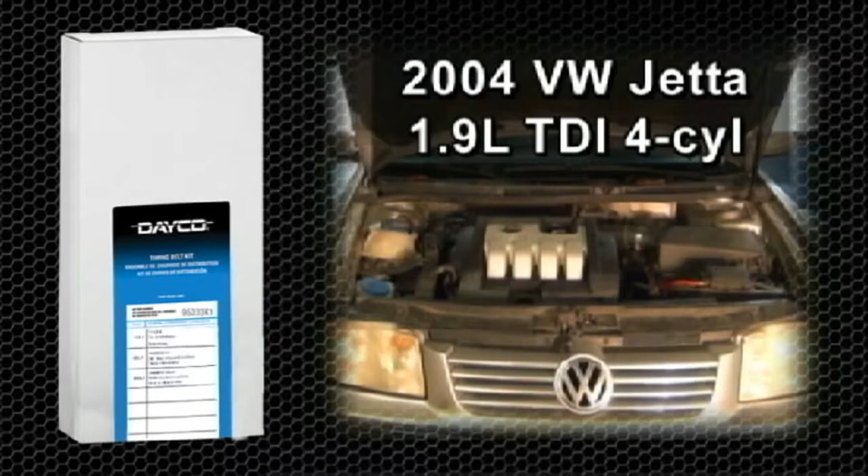This video highlights some of the steps involved in installing the Dayco timing belt kit number 95333K1 on a 2004 Volkswagen Jetta with the 1.9-liter TDI 4-cylinder diesel engine. The kit includes a high-performance, high-temperature timing belt number 95333, an OEM quality tensioner, and an idler pulley.

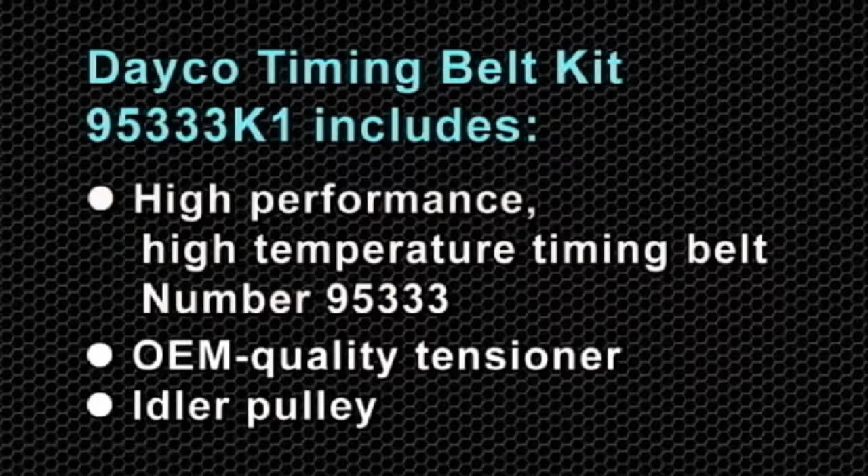As usual, instructions are included in the kit, and these should be followed exactly. For safety's sake, the key should be removed from the ignition, and the negative battery cable should be disconnected.

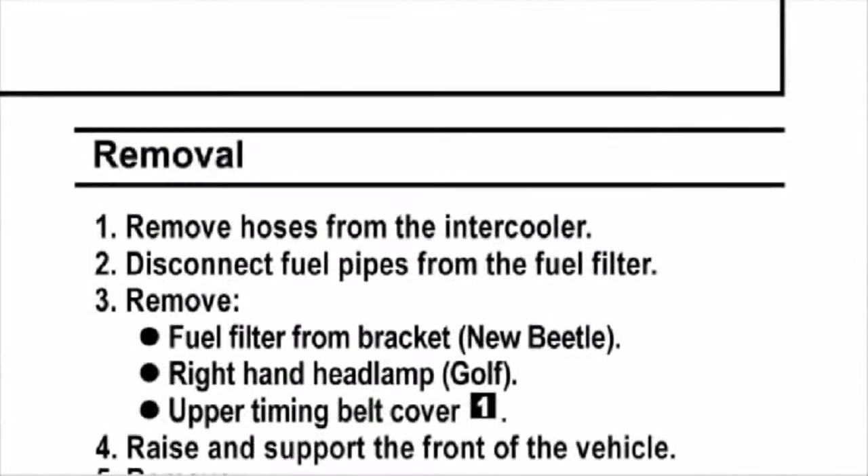The Autodata instructions list begins with the items that need to be removed in order to provide access to the accessory belt and timing belt drives. The following video contains some, but not all, of the steps listed in the instructions.

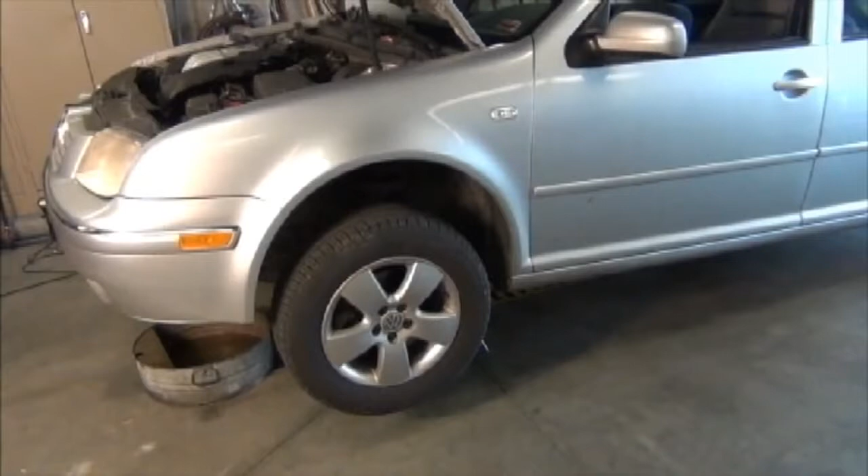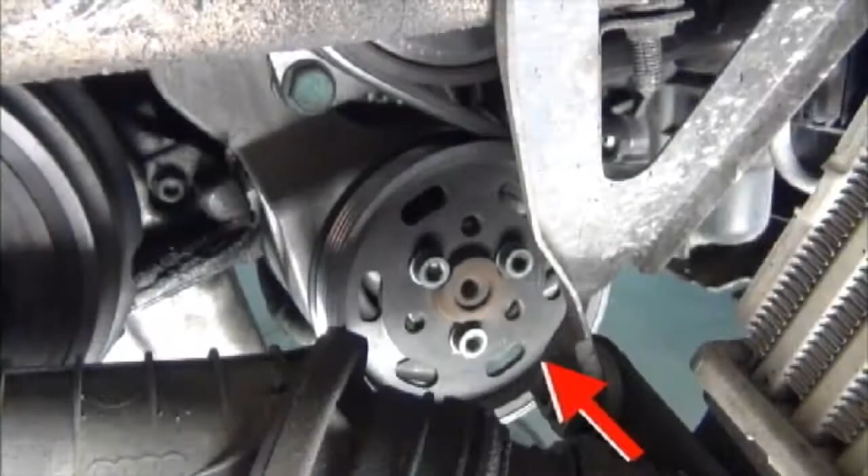The front end of the vehicle should be jacked up and then supported by jack stands. Remove the right front wheel, then the wheel tub, and finally the splash pans. This will provide access to the bottom of the accessory drive, the crankshaft harmonic balancer and pulley, and the intercooler.

The turbo hoses will have to be removed to access the crankshaft balancer and sprocket and the accessory drive.

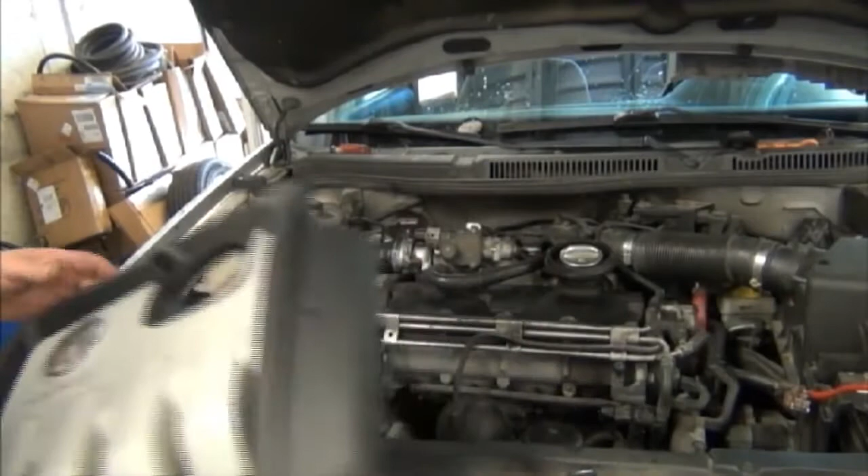At the top of the engine compartment, unbolt and remove the engine cover. Also, unbolt and remove the coolant fill tank, disconnecting the hose from the radiator.

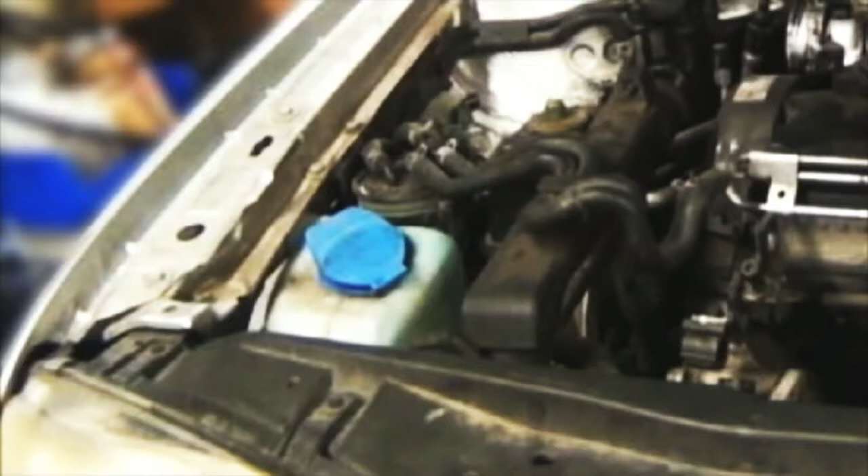Next, disconnect and remove the intercooler intake hose. Toward the front of the engine compartment, remove the headlight bucket so you can remove the front intercooler intake ducting and any fuel lines that might get in the way.

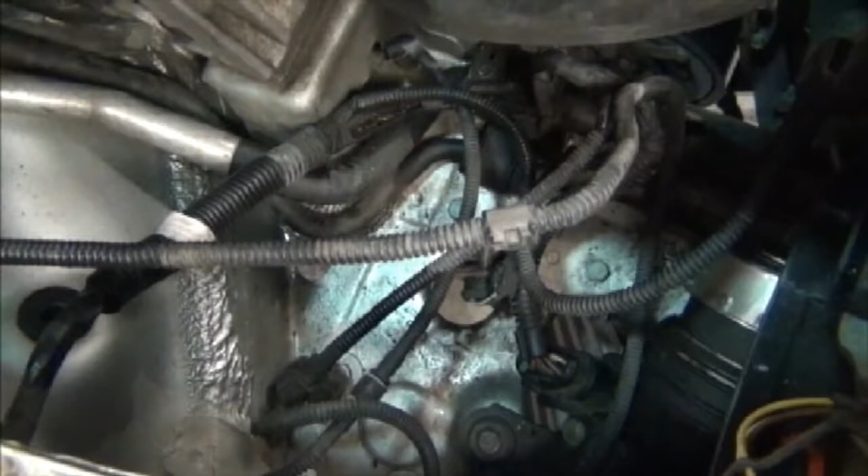Here's a view looking down the right fender after the fuel vapor filter canister and windshield wiper fluid reservoir have been removed. With these items out of the way, access was gained to the clip on the turbocharger intercooler inlet tube. The next item to focus on is the power steering reservoir and its attached hose.

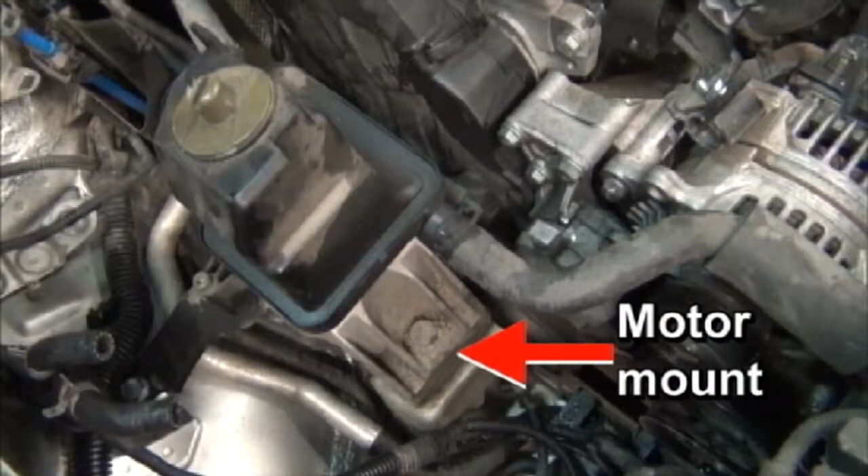Removing the reservoir and bending back the hose will permit much easier access to the motor mount beneath them. After draining the power steering reservoir, its hose can be bent back and it can be parked on top of the strut tower.

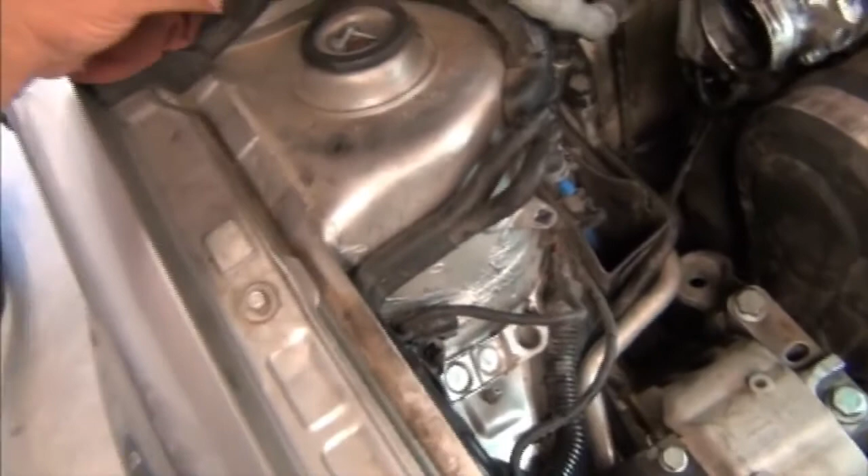The next step is to remove parts of the accessory drive. Engage a wrench onto the square tab at the top of the tensioner and rotate it to release tension on the belt.

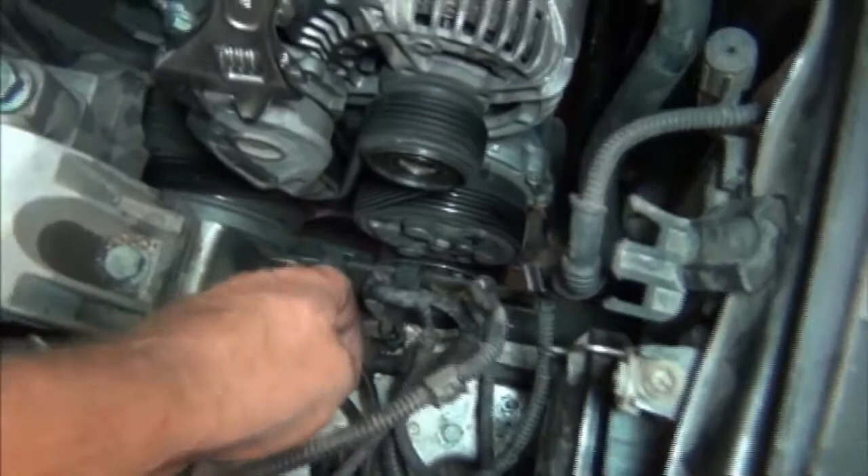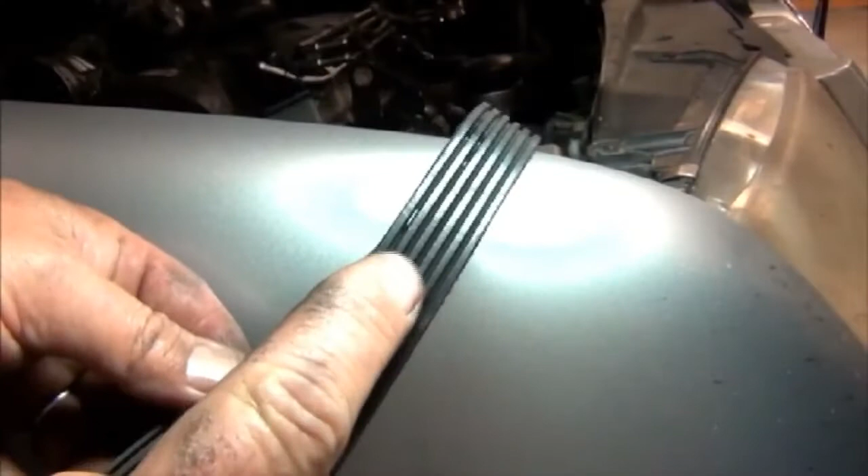Now the belt can be removed from around the accessory drive pulleys. The accessory drive belt is a dual-side poly V. The side that has been running against a flat pulley has ribs that are worn down and shallow. Some pilling can be seen on both sides of the belt. This belt is ready for replacement.

The tensioner should be removed and tested to see if it also needs replacement. The alternator pulley was making noise when the vehicle was brought in and has a lot of play, so it will definitely be replaced. Looking at the top of the engine compartment, this is the top half of the timing drive cover, which has been removed.

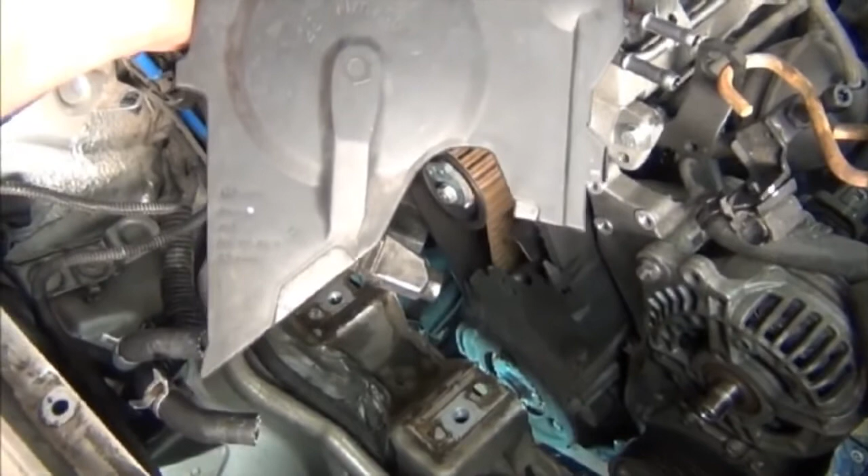The notch in the bottom edge fits around the upper motor mount bracket, which has been unbolted and slid to the rear. Completely removing the motor mount is extremely difficult, and this placement still allows adequate access to the timing drive belt and automatic tensioner.

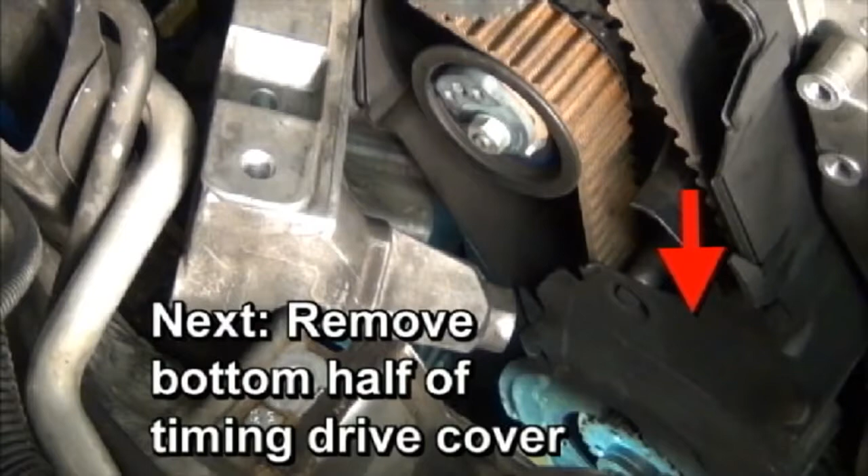The next step would be to remove the bottom half of the timing drive cover. With the lower timing drive cover removed, this is the view looking upward from the crankshaft pulley toward the water pump, which shows signs that it was leaking coolant.

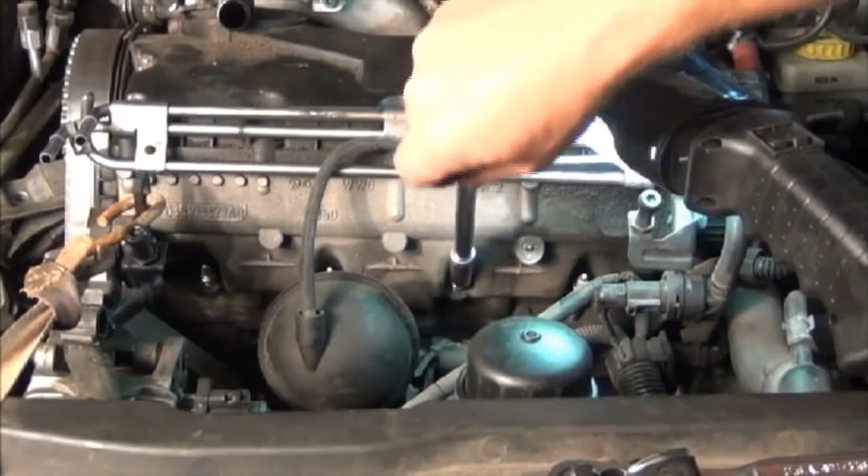This water pump will be replaced as part of this service. To facilitate the manual rotation of the engine in a few minutes, the glow plug should be removed in order to eliminate compression within the cylinders.

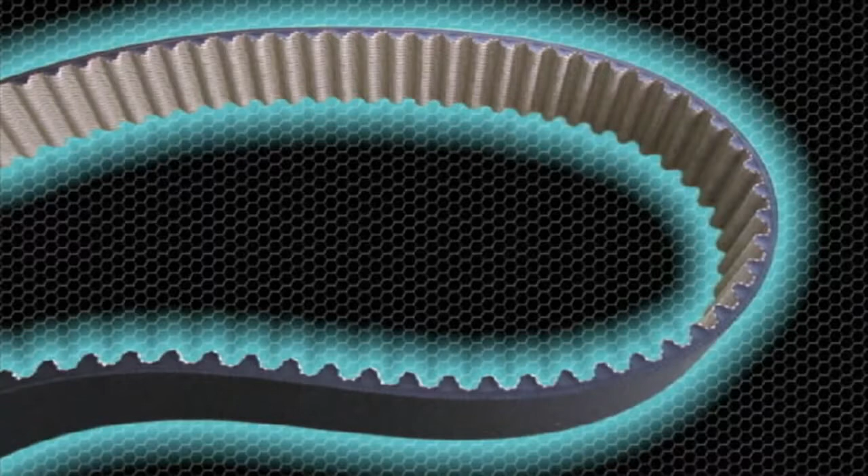Here is the kit mentioned earlier that will be installed, the Dayco timing belt kit number 95333K1 with components. It includes Dayco's high-performance, high-temperature belt. The kit also includes an automatic tensioner.

When the preload is set correctly after installation, this point will be centered in this window. The kit also contains the Autodata instructions for the application.

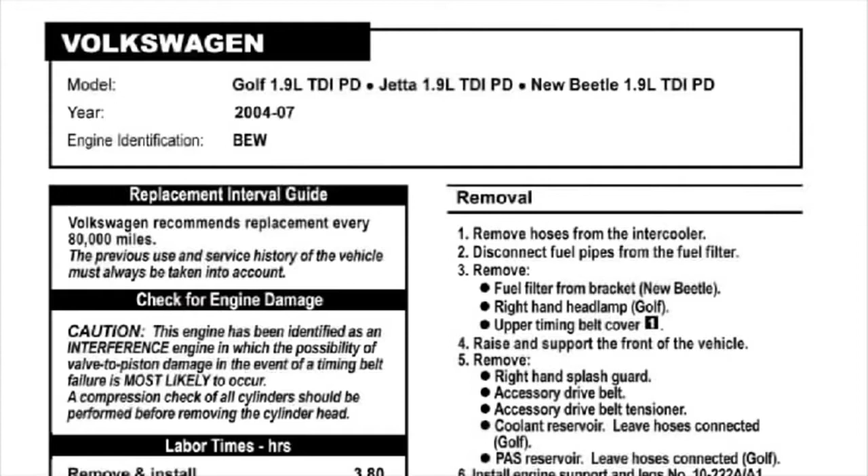If these instructions are consulted at this point in the process, it can be seen that the current step is removal step number 8: turn the crankshaft clockwise until the number 1 cylinder is at top dead center of the compression stroke. Continuing, step number 9 is ensure that the timing mark is aligned with the notch on the camshaft sprocket hub 4Z, which is shown on the drawing as illustration 8.

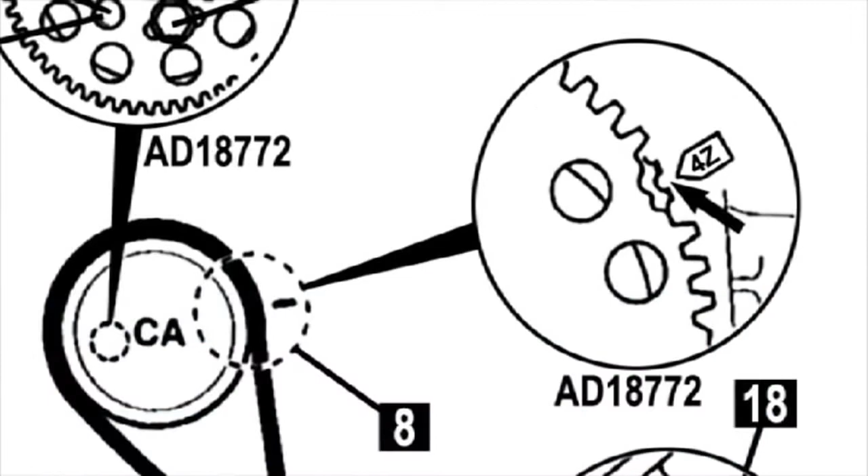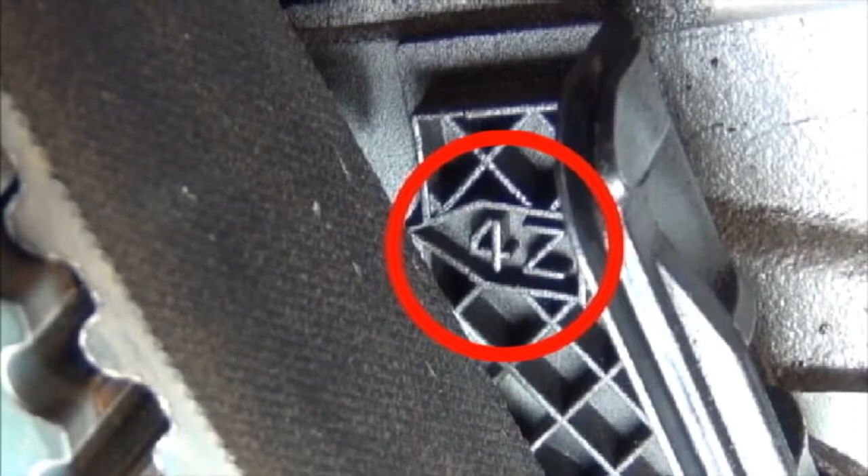This shows the back of the cam cover at the cylinder head at about the 3 o'clock position. There will be an arrow with 4Z on it, which should align with the notch on the camshaft sprocket hub. Here's the actual 4Z arrow that is molded into the back of the timing drive cover. If the camera is moved to the right, the notch can be seen on the reluctor ring behind the cam sprocket.

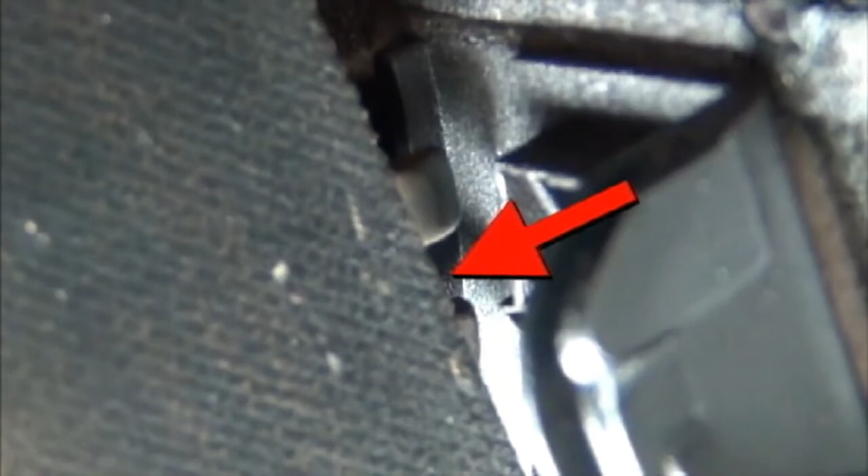This notch actually serves as the trigger for the cam sensor. Next, step number 10 says, lock camshaft.

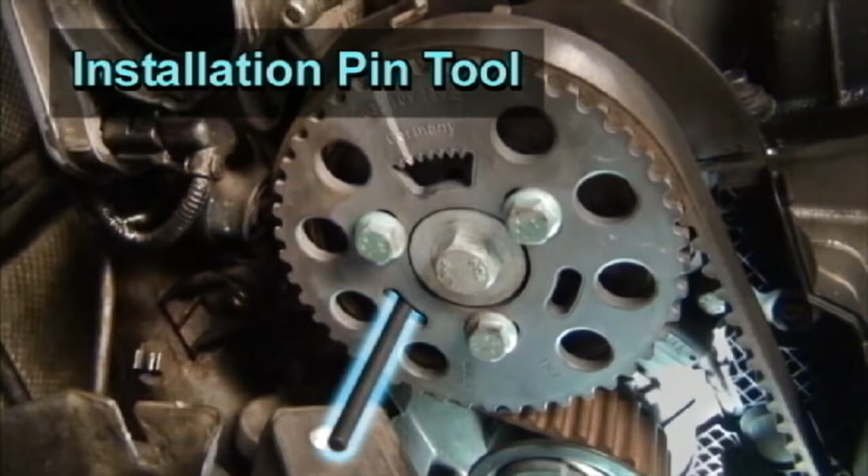Use tool number 3359. Here's the camshaft with the installation pin tool installed. It goes through the sprocket into the designated hole in the cylinder head. Its purpose is to hold the internal assembly in the proper location.

These bolts will be loosened in order to get the belt tension set correctly on the tight side of the belt. That allows this sprocket to be a floater while the belt tension is being adjusted, while the pin is holding the internal assembly in place for perfect timing.

Step number 11 says, lock the crankshaft sprocket. Use tool number T10050. Back in the wheel tub on the passenger side, alignment marks have been made on the crankshaft sprocket and the front of the engine case.

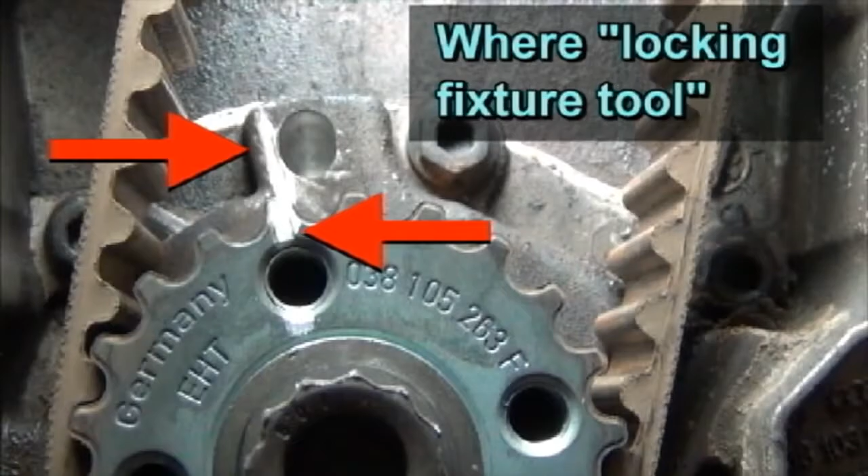This is where the locking fixture tool will be applied. Going to the instructions, illustration 11 shows the crankshaft with the two alignment marks.

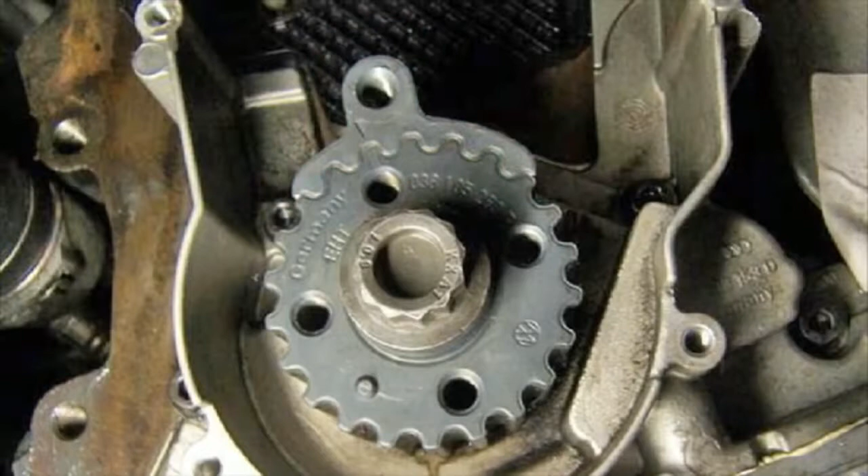Illustration 10 indicates the locking tool that holds the crankshaft in position. Here is a shot of the locking tool in position on the crankshaft, and here's an even closer look. Some versions of this tool have a knob on the end to make installation easier.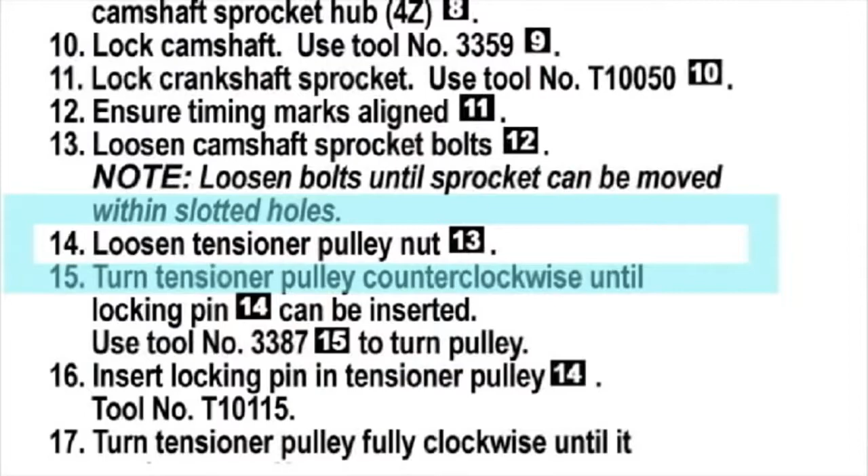Step number 14 is loosen the tensioner pulley nut, which is indicated in illustration 13 in the drawing. While loosening the tensioner pulley nut, at some point the spring will unload, thereby loosening the tension on the timing belt so it can be removed.

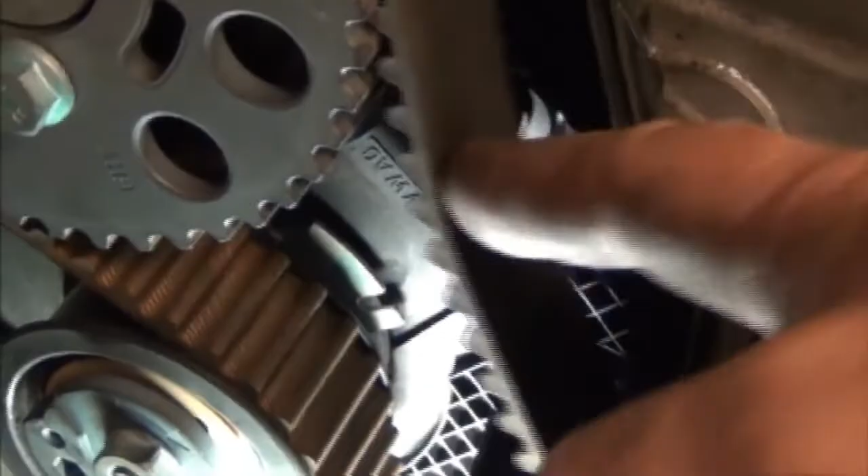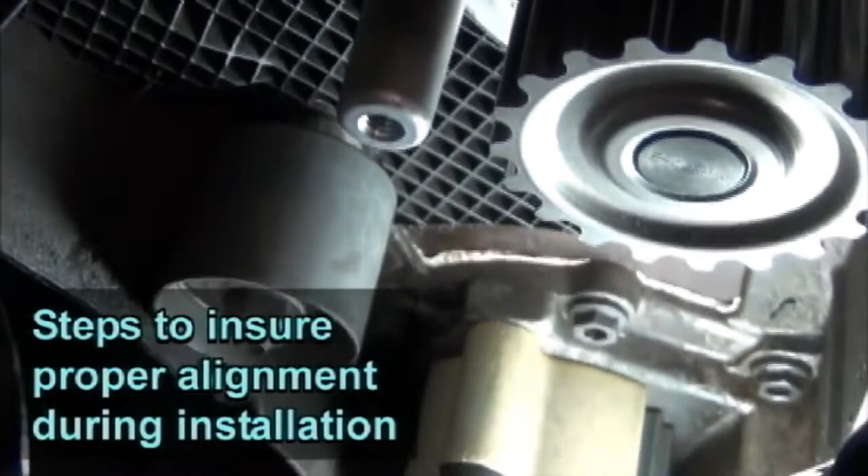The old timing belt and tensioner have now been removed. To review, the following steps have been taken to ensure proper alignment of the drive during the installation of the new timing belt. A new water pump has been installed to replace the old leaking pump.

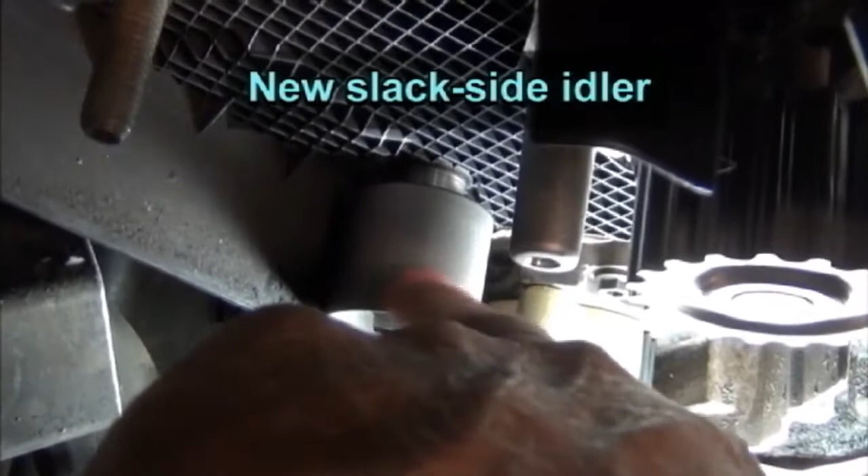A new slack side idler has been installed. Dayco strongly recommends that all hardware be replaced on a timing drive while this level of access is available. The cost of labor to get back inside the drive again later far exceeds the hardware cost.

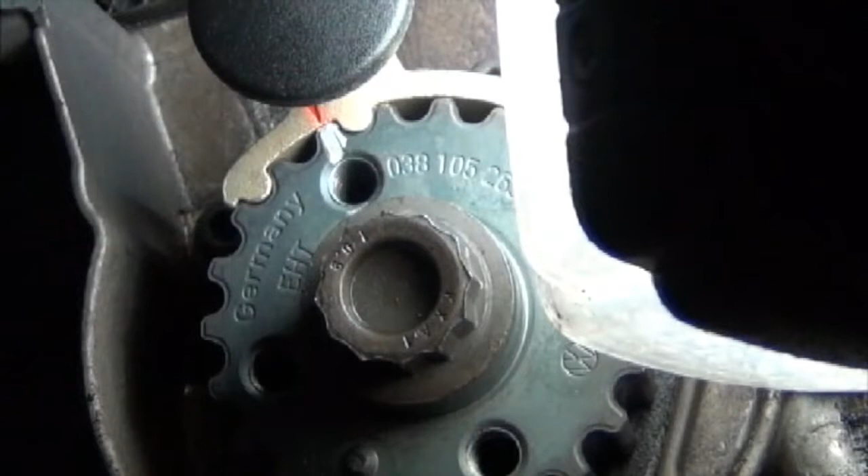Continuing with the steps, the crankshaft locking tool has been inserted into the hole in the engine so that the red arrow on the tool lines up with the mark on the sprocket. Here's a view from above to show how the tool fits.

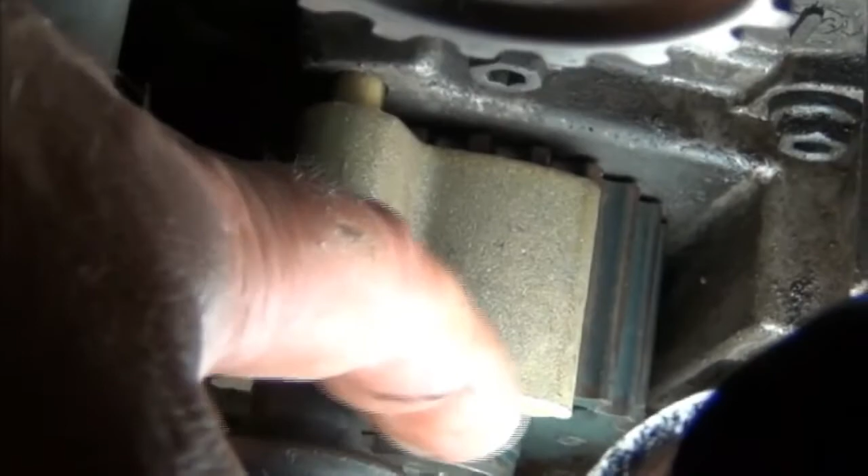The camshaft installation pin has been inserted through a slot in the camshaft sprocket into the cylinder head to keep the internal assembly in place so that the notch in the reluctor ring is aligned with the 4Z arrow molded into the back of the cover.

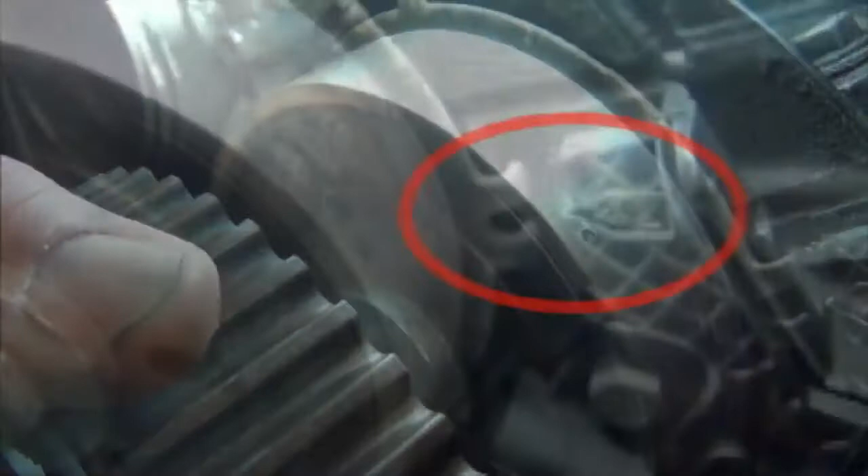Removing the sprocket allows a much better view of the reluctor ring and its notch. Before the new belt is installed, the new tensioner must be installed and adjusted.

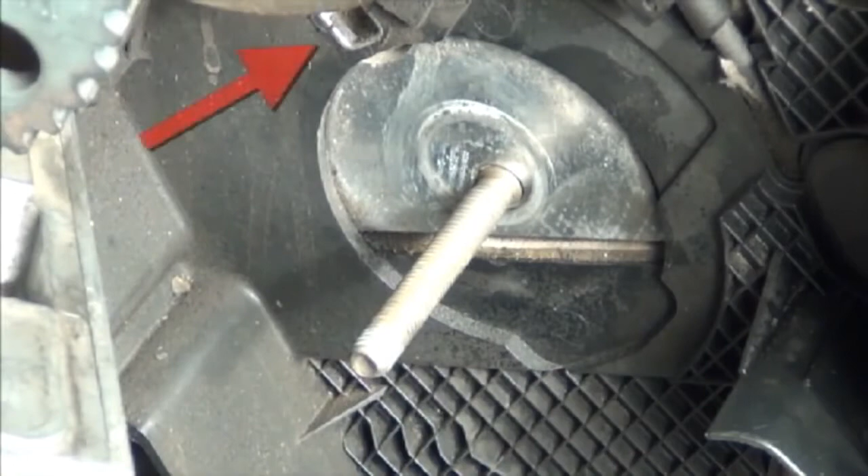On the back side of the tensioner, there is a retaining lug that fits into an indentation in the back of the engine case. Removing the camshaft sprocket gives a clear view of the indentation into which it must index. The retaining lug can be seen in illustration number 16.

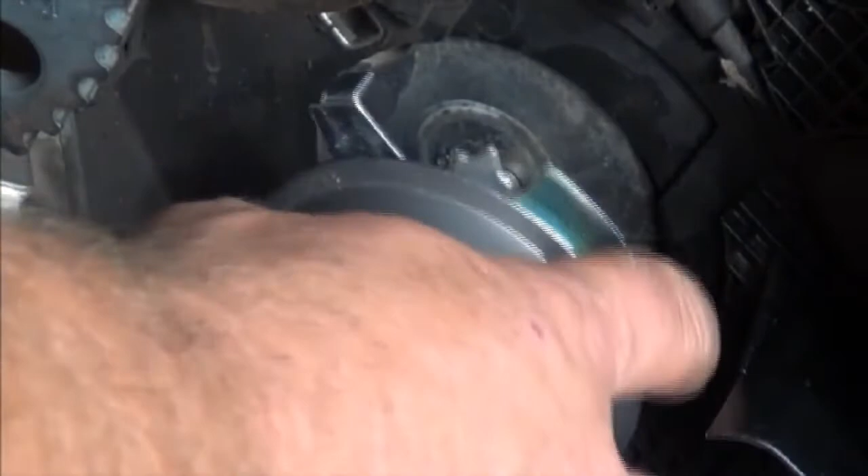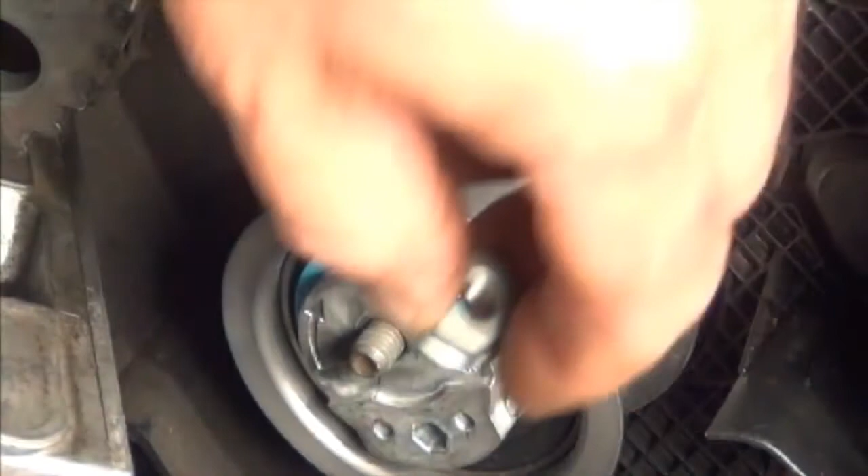The tensioner is slid onto its mounting stud, with the retaining lug properly indexed into the indentation. A slight wiggle will verify this. Next, the tensioner nut is threaded onto the mounting stud, finger tight.

Installation step number 4 calls for the insertion of the tensioner locking pin before installing the tensioner, but it can also be done after step number 5.

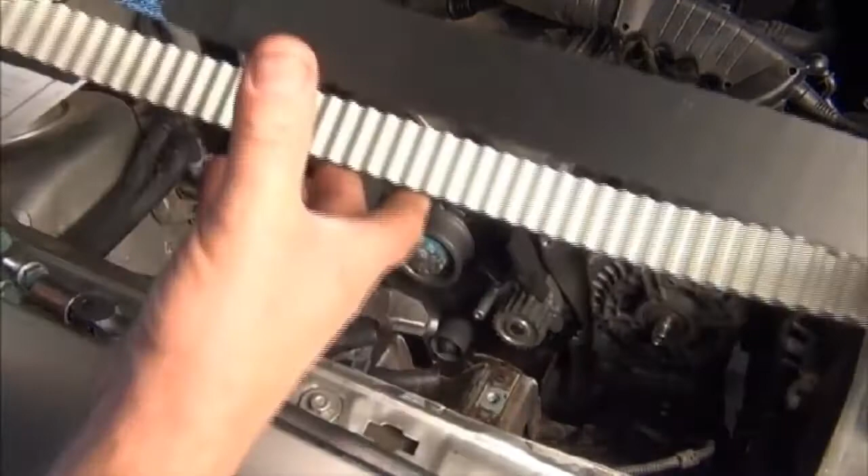Now it's time for the new belt installation. The belt is typically installed so that the belt label reads correctly in the direction of rotation, in this case, left to right. The installation should begin at the crankshaft pulley and proceed in a clockwise direction according to step number 7.

Once the belt has been loosely fitted around the correct routing for the drive, the next step is tensioning.

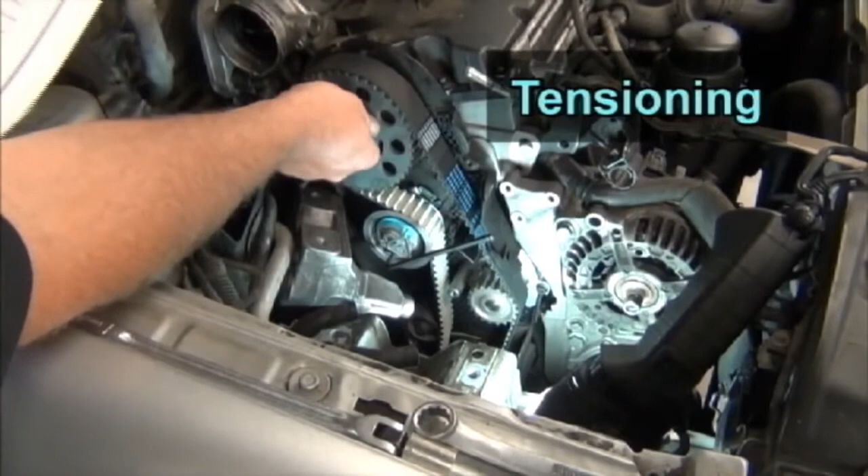The bolt in the camshaft sprocket must be backed off enough for the sprocket to turn freely. The tensioner nut must also turn freely, and the tensioner locking pin must still be installed. The drive is now ready for the correct tensioning adjustment.

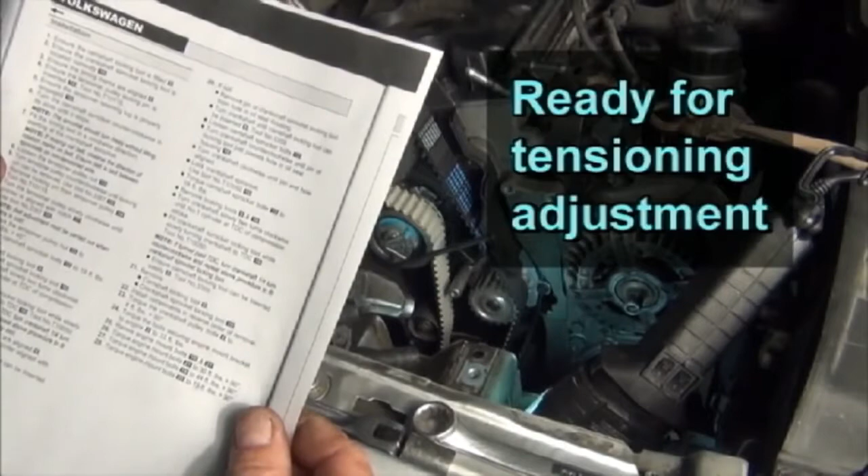Following step number 9, turn the tensioner pulley counterclockwise until the locking pin can be removed. Next, the locking pin is removed.

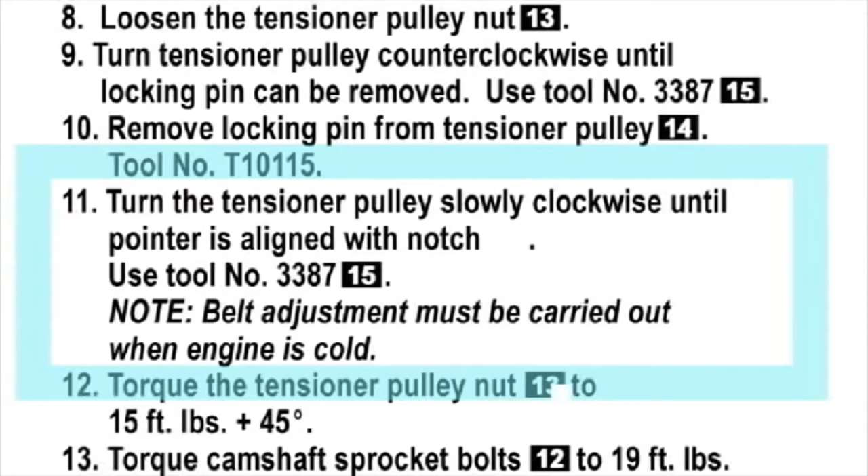In step number 11, the tensioner pulley is slowly rotated clockwise until the pointer is aligned with the notch in the window. Here is a close-up of the correct alignment of the pointer in the window.

The tensioner nut is ready for an initial tightening, and then a final tightening to the torque spec in step number 12, to 15 foot-pounds, plus an additional arc of 45 degrees tighter. Next, the camshaft sprocket bolts are torqued to 19 foot-pounds.

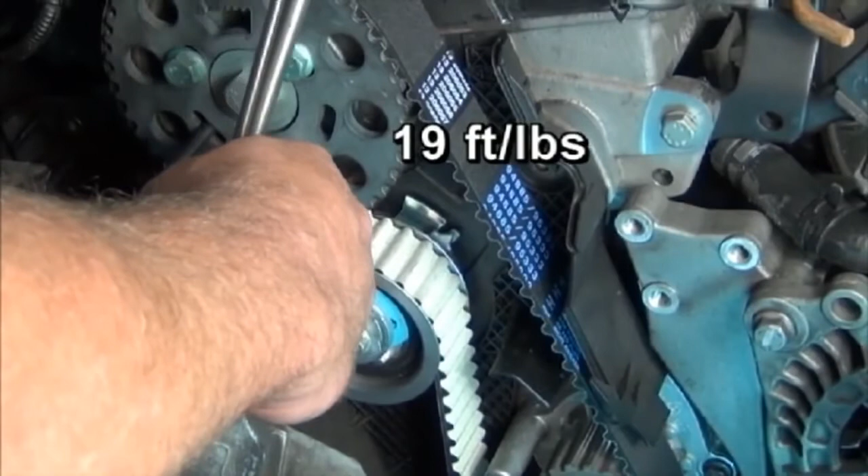Now the camshaft locking tool can be removed, as well as the crankshaft locking tool.

Next, step number 15 should be followed to rotate the crankshaft slowly 2 turns clockwise until the number 1 cylinder is at top dead center of the compression stroke.

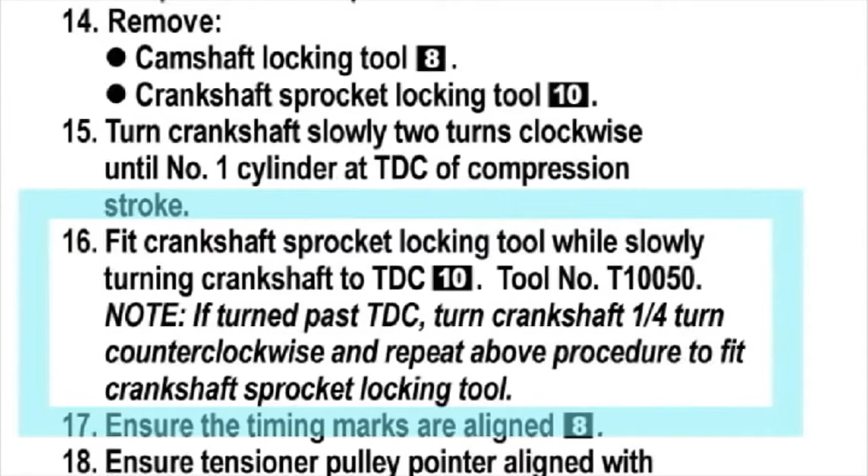Now the crankshaft sprocket locking tool is reinstalled, while slowly turning the crankshaft to top dead center using tool number T10050. Next, step number 17 says, to ensure the timing marks are aligned.

Step 18 says, to ensure that the tensioner pulley pointer is aligned with the notch. And step 19 says, to ensure that the camshaft locking tool can be inserted easily.

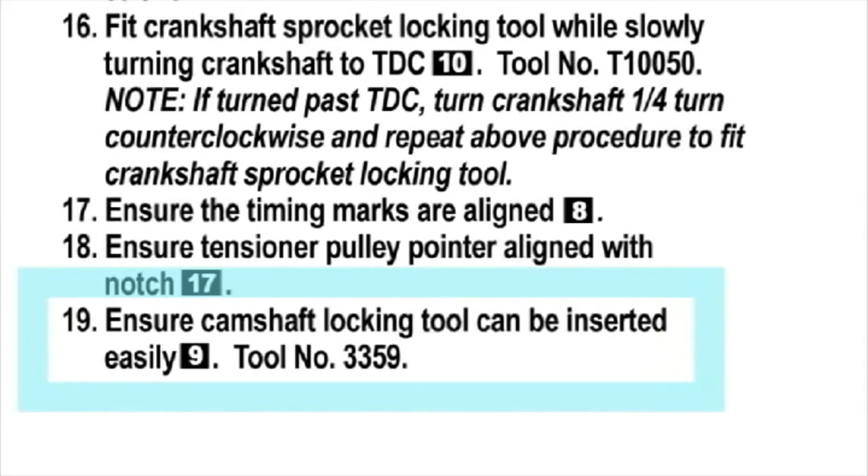If these steps are successful, remove the crankshaft sprocket locking tool, then reinstall the vehicle components that were removed to access the drive. Torque specs for the various bolts involved can be found in the instructions steps 23 through 28.

The engine should be started for a short run-in to make sure the timing drive has been correctly replaced.